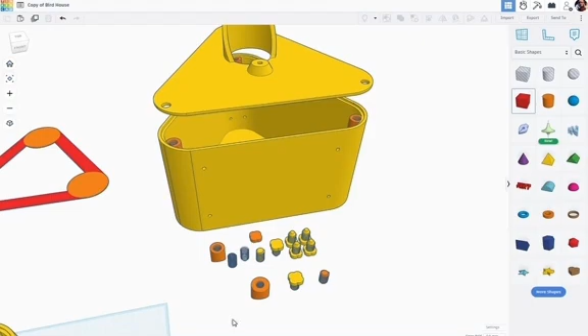So where we left off, we were working on this corner part, which is the threaded hole for our 3D printed threaded screws. Now it's time to place these in the shell of our birdhouse, and we have that back over here. Let's zoom out a ways.

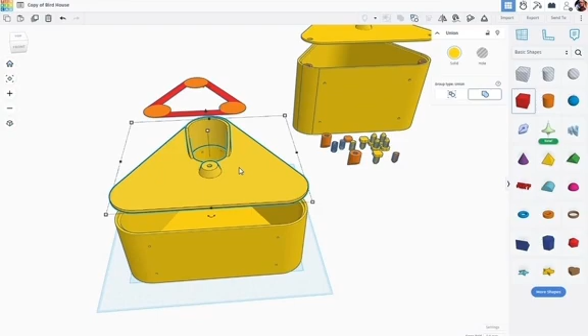Let's go ahead and hide this front portion of it here. So I've selected it, I'm going to hit Control H to hide. Now let's get a duplicate of our whole part back here, Control D.

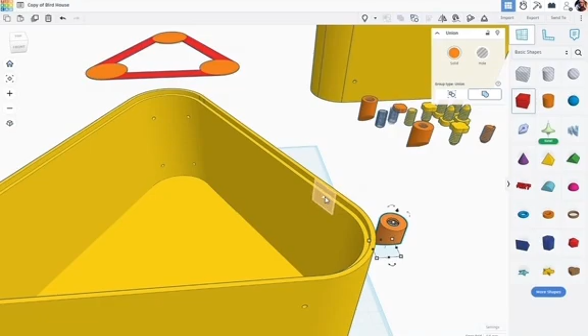Now what we want to do is get these to be just below the level of this edge, this cutout. So what I'm going to do here is hit W for work plane. I'm going to zoom in here and put that work plane on that top edge.

There we go. And while that whole part is selected back here, the threaded hole, I'm going to hit D to drop. Let's bring that over here. Let's put our work plane back on the default, W. There we go.

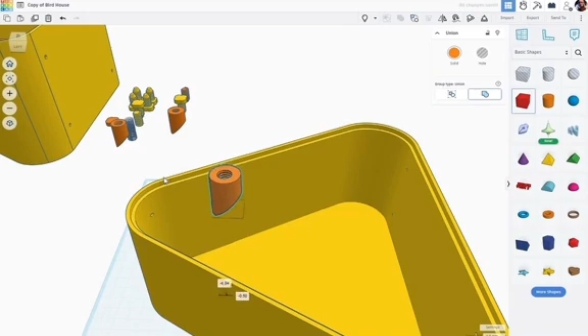Now I'm going to zoom in here, and I'm going to bring this down to the level of that part here. Zoom in again. Let's use our W again.

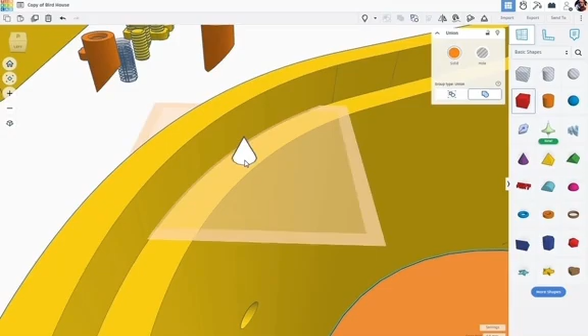Now you see the arrow of this work plane tool is pointing up. I'm going to hold down the Shift key so that the work plane is actually facing the other direction. Now, while this whole part here, this threaded hole, is selected, I'm going to hit D, and it's going to be right at the level of this lip. Once we have that set, I can hit work plane and put it back on the default.

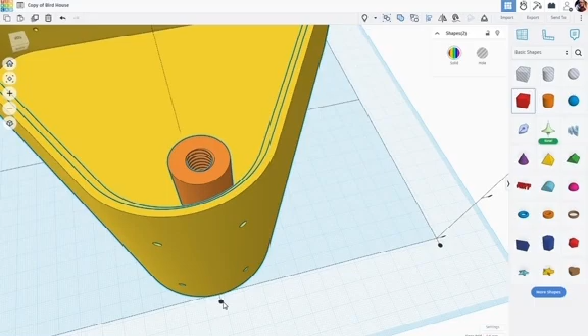Let's cut around over here. Let's get this lined up with the shell part. So I'm going to select that shell, hit L to align, and click on the shell to make it the master. Those are aligned in that direction.

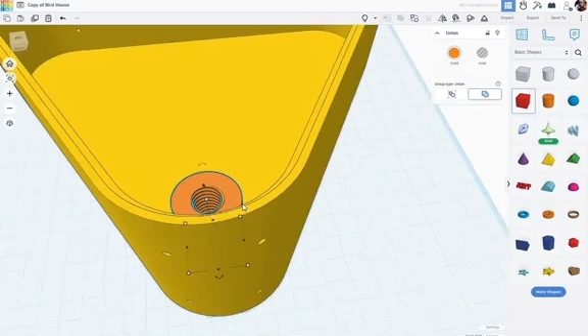And now I can move this whole part, the threaded hole, into place, into the shell. We don't want to cut into the threads, but we do want to move it in close enough. That's too far -- right about there. So that's a good place for that.

Now we need to do the other two corners, but for the other two corners, we want to rotate this a bit. So let's grab another duplicate of that, Control D. For now, I'm going to drag it over here.

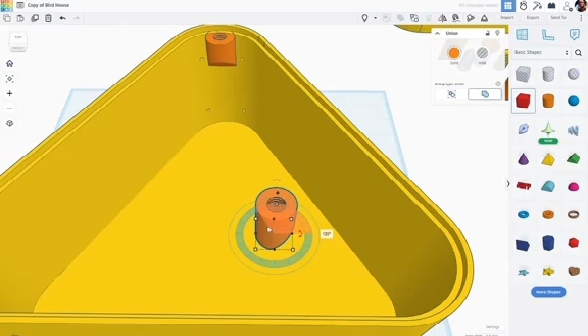Now that cutout part at the bottom, I want to rotate. So I'm going to click on the rotation handle, and I believe we want to go 120 degrees. There we go.

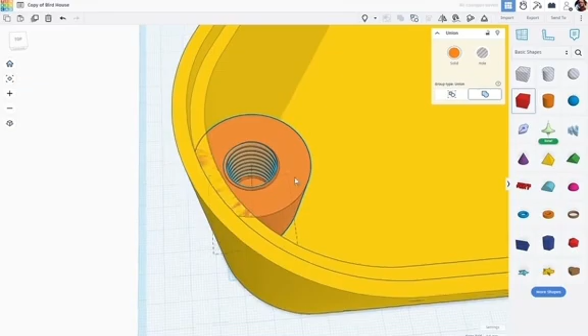Let's bring that over here, get it lined up in our corner here. And we can use the cursor keys to sort of shift-nudge this into place. Okay, we're not poking through. Right about there is good.

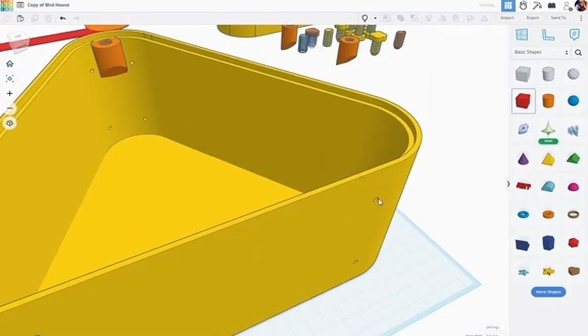Now, to keep the next one in line here, we're going to do this a real simple way. While I still have that selected, I'm going to hit Control D. Let's do that again. Let's back out. We'll select on that, hit Control... whoops.

Control D. I'm going to hit M for mirror, then mirror it the other direction. I'm going to shift nudge it over here, and just like before, move it over, but I don't want to be poking through the side. That's too far. There we go.

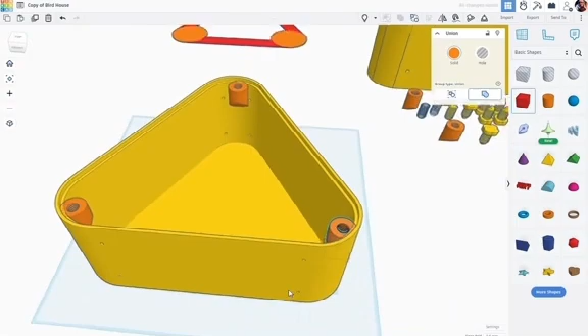To make sure they're both perfectly aligned, I can select them both temporarily, union or group them together. Control G. Now I'm going to shift select the housing, the shell there.

L to align. I'm going to click the shell, line it down the center. Now, before we group those into this back shell, I want to use them to do our alignment. Looks like our top one is out of alignment here.

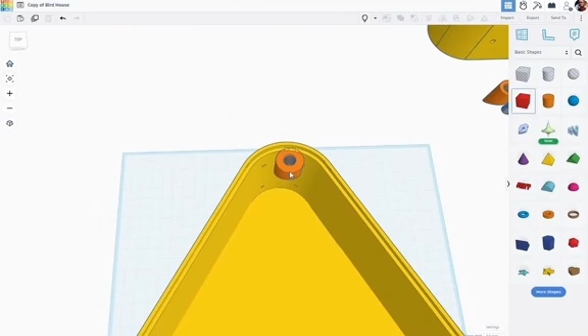Let's fix that. Click on the shell. There we go. Now, for now, I'm not going to group those. I'm going to use those to align the holes in the lid for the screws to go through.

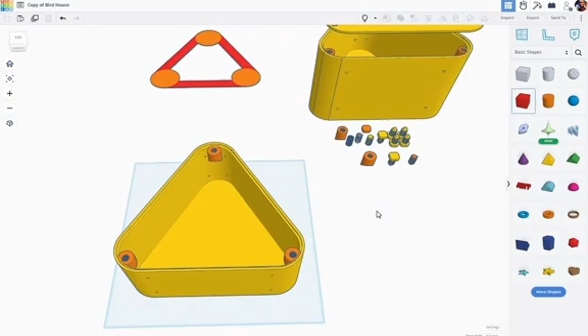So let's bring our lid back. That was hidden. Control-Shift-H to unhide. There we go. Now, back when we were making this threaded screw, I had pulled off this copy here.

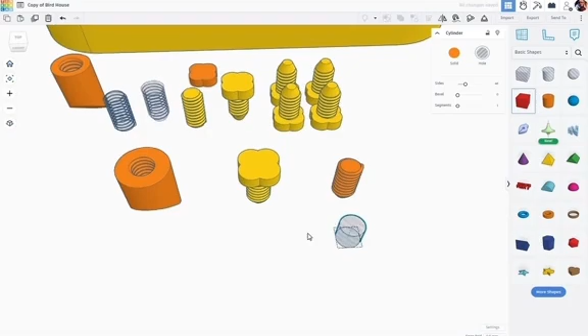And I'm going to use that as I want to know the size. This is 9.7, so I want a hole that's about 10 millimeters in diameter. So we're going to bring that out. I'm going to hold Alt-Shift, click on a corner. We'll make that 10 millimeters, and increase the height just a little bit.

We can bring that over here. Let's bring it up. All right, now while we have it there, I'm going to shift select this corner orange part, but we need to ungroup that.

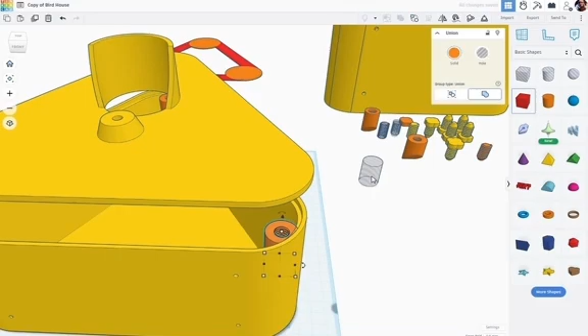I'm going to shift select that whole cylinder, L to align. I'm going to click on this orange part to make it the master. Center it that direction, center it that direction. So now that hole will be directly above these threads.

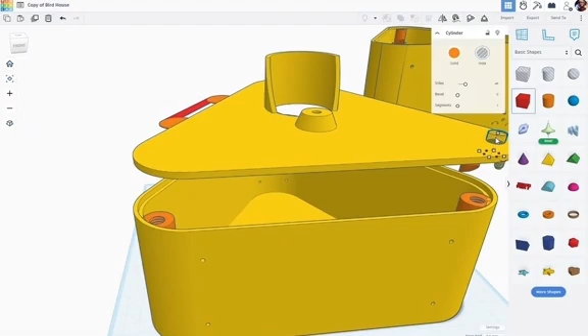Do the same thing for this other corner. I'm going to select that hole shape, Control D to duplicate. Shift select this orange part here, L to align, click on the orange part to make it the master, align it that direction.

We'll do the third one here. Select that part, Control D. Shift select the orange part. L to align.

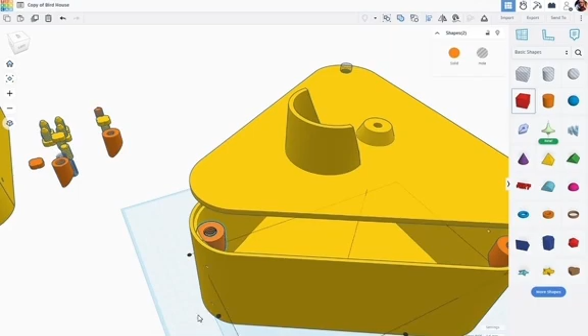Before I do that, let's move this part into the shell just a little bit more. There we go. Let's grab our duplicate back here again. Shift select that, L to align, click here, center it that direction.

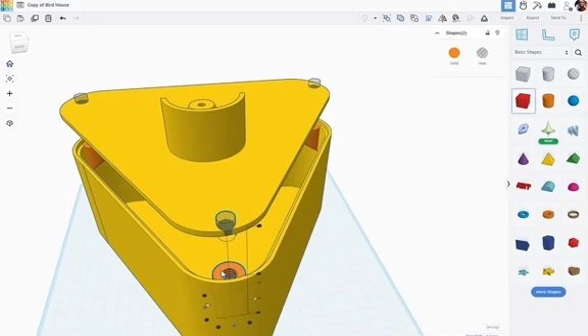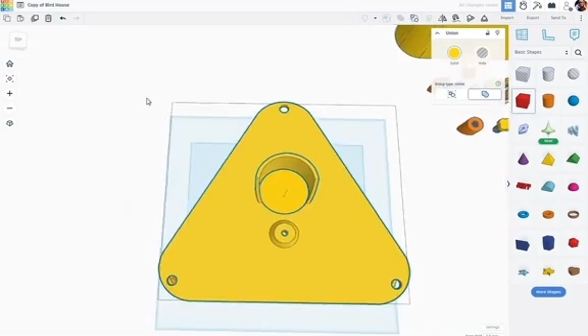Okay, we have that aligned. Now we can come to the side here. Let's select those parts at the top. Control G to group them together.

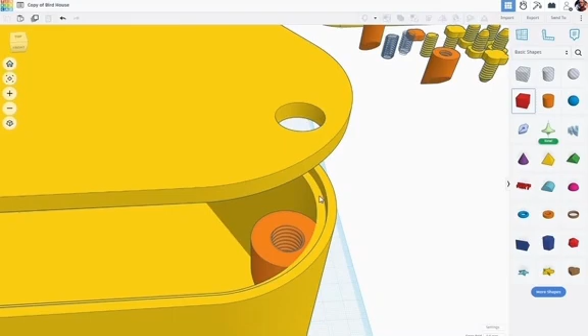Now if we zoom in here and put our work plane on that lip, click on this part, hit D to drop, we should see that our holes in the lid are lined up with the threaded holes that are in the base of this.

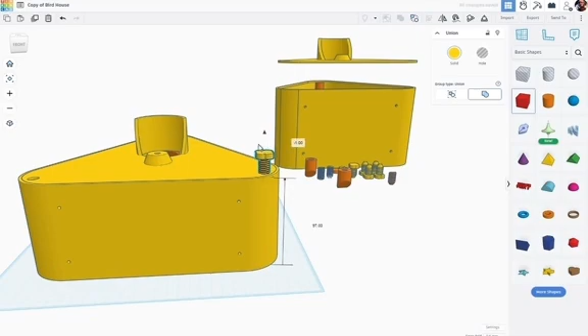We can bring out one of our screws here. Bring that down a bit. For the moment, we could make this transparent. And you can see how that screw would fit in there, and it's got a little bit of gap at the bottom. So there you have it.

There's our birdhouse project, done in 6 parts.